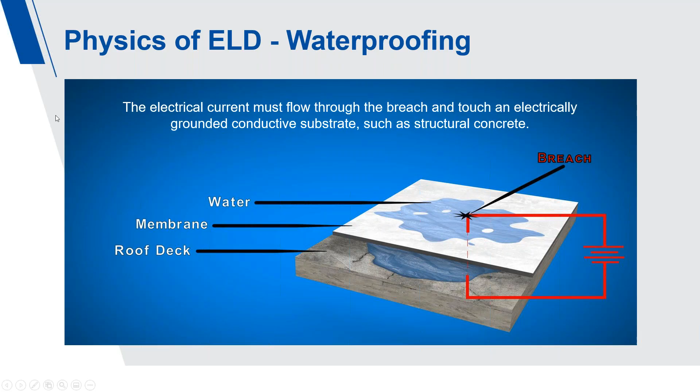Now, on a conventional roof, there's usually coverboard, insulation, and a vapor barrier below that membrane. None of those layers can carry an electrical charge, meaning ELD will not work. In new construction, if the membrane's already installed, these layers are blocking that electrical path to the concrete or metal deck. So in new construction of a conventional roof, there has to be an added conductive medium to make ELD possible.

That would be the TruGround Conductive Primer. That's what you're seeing here in this image - TruGround is added to the substrate directly under the membrane. In this case, it's coverboard, and that provides the required conductivity. So now ELD is possible, and these breaches can be found, repaired, and retested before the warranty begins or before the customer moves into that building. That is the physics of ELD on a new conventional roof.

These are the two ASTM standards for ELD. The first was published in 2014, the ASTM Standard Guide D7877. That lists the 4 different ELD methods: Detec scanning platform, Detec's vertical roller, low voltage vector mapping, and high voltage, also known as spark testing or holiday testing. That guideline, 7877, lists those 4 methods and describes the testing apparatus used, the testing procedure, and the limitations of that test.

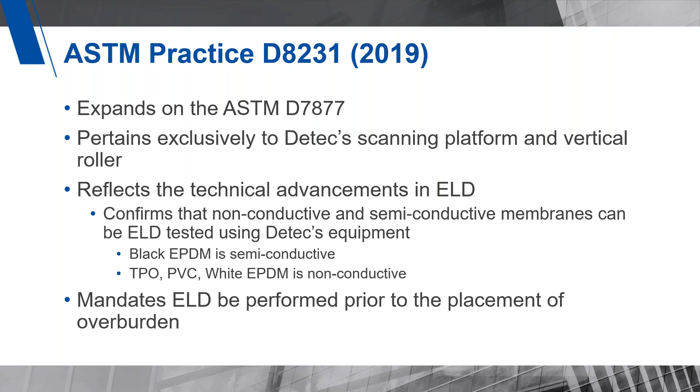The D8231 also mandates that ELD testing must be done prior to the placement of overburden. You can't test through overburden with reliable, repeatable results. I'll get to that here shortly.

So these are the 4 basic requirements for all 4 ELD methods. They all have to have a conductive substrate directly under the membrane. On the waterproofing side, that's usually concrete, and on the roofing side, it's got to be a conductive medium, such as TruGround conductive primer. They all have to have a ground connection to that substrate, something metallic or conductive that is connected to that substrate and penetrating the membrane. Usually that would be a metallic drain bowl, lightning rods, anchors, HVAC units, exposed rebar - anything you can connect your cable to that is metallic and touching that substrate.

They all have to have an exposed membrane, meaning it cannot be covered by overburden. There is no way to reliably get an electrical current through overburden with reliable, repeatable results. I will talk about that here shortly.

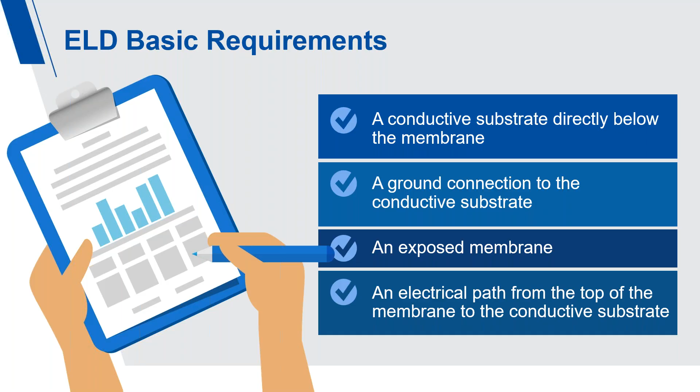They all have to have an electrical path from the surface of that membrane to the surface of the conductive substrate. Low voltage methods use water, and water is what carries the electrical current - wherever that current or wherever the water flows, the electricity flows. Then there's high voltage, which does not use water, and it's a direct vertical air gap, and you can actually see the spark travel through air. So this is high voltage, there's the spark.

High voltage was created for testing coatings on pipes, and then that technology was adapted for the roofing and waterproofing industry. It works on horizontals, verticals, transitions, but it does not work on semiconductive membranes such as black EPDM. The technician applies up to 40,000 volts to the surface of a completely dry membrane, and at the location of a breach, there'll be a spark, they can hear a pop, and the electronics will beep.

The limitations of this method are that it can only be done in dry conditions, so rarely is this ever seen here in the Pacific Northwest. It cannot be performed in inclement weather. There cannot be pooled water, frost, dew, or trapped water under a protection course - all of that can create a false positive. They'll spark into that moisture thinking it's a breach. So the membrane surface does have to be completely dry.

The technician has to adjust their voltage for the mil thickness that they're testing. In a fluid applied situation, if that thickness fluctuates and the voltage is set too high, it can actually burn through the membrane. And if the voltage is set too low, it won't even spark at all. So it's heavily reliant on that technician to have the proper sensitivity, the voltage set.

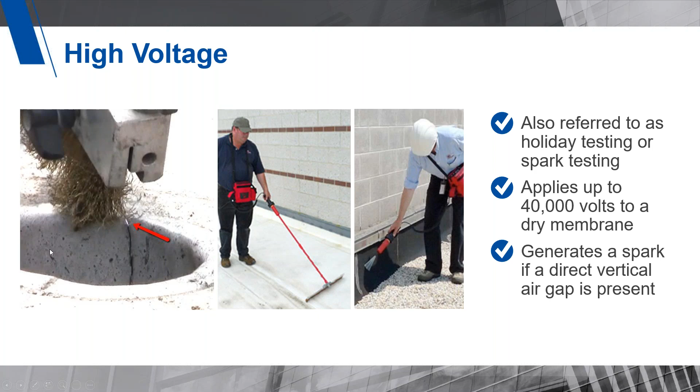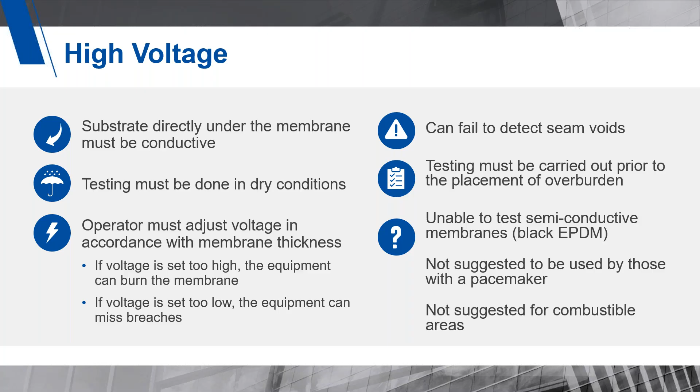High voltage does not work on semiconductive membranes such as black EPDM, and it is not suggested for those with a pacemaker or to be used in combustible areas.

The first low voltage method I'll tell you about is called vector mapping, sometimes called EFVM or vector testing. There's a lot of different terms used for it. This was also created in Europe in the 1970s, originally for testing pond liners that were filled with water, and then the technology was adapted for the roofing and waterproofing industry.

How this works: it works on horizontal surfaces that are non-conductive, so this does not work on black EPDM. The technician sets up a wire along the perimeter of a testing area - there it is in the background. All that wire does is isolate the area, usually up to 7,000 square feet or so. Then within that wire, they have to isolate every single grounded object, such as a drain, because those will be seen as a breach or a hole in that membrane.

Then the membrane has to be flooded with water. The perimeter wire is pulsed with up to 40 volts of electricity, and that electricity requires water to flow within that isolation area. So the larger the area that's isolated, the more water that's needed to carry that electrical current. If there's drains or the area is sloped or there's dry spots or gaps in that water coverage, all of that can result in a break in the electrical path, in that water path.

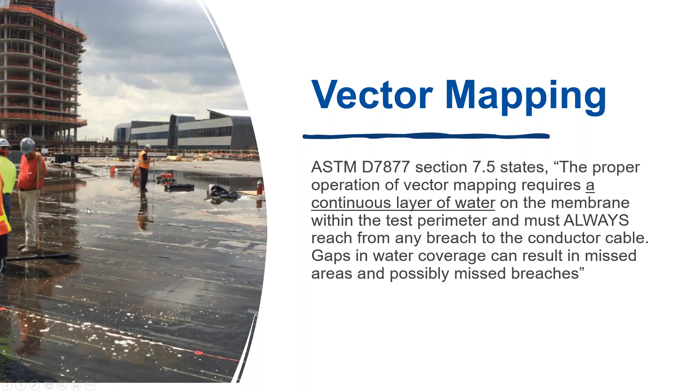That's why best practice with this method is to flood it with at least a quarter inch of water or more. Some testing agencies will use dish soap to help create that continuous film. Again, the larger the area that's isolated, the more water that's needed, and dish soap will help create that continuous film, but it's also an OSHA nightmare.

Now with vector mapping, they set up the wire along the perimeter, isolate the grounded objects, flood the membrane, and then use these probes, and the electronics point in the direction of a drop in voltage. What that means is the perimeter wire is pulsed with 40 volts, the surface of the membrane is 40 volts - that's where the water is - and then the location of a breach or the hole is 0 volts. That's building ground. So the electronics sees the sum of the entire area, pointing in the direction of everywhere where there's a drop in voltage.

So if there's a lot of breaches, that test can take forever. Basically they just hunt and peck and poke and prod, pointing in the direction of a drop in voltage. When they find a breach, it has to be isolated or repaired right then and there, otherwise the equipment will continue to sense it or point in that direction throughout that test. That can make testing very, very difficult if there's a lot of breaches.

Also, because it's pointing in that direction of a drop in voltage, you could have two breaches close in proximity, but it's pointing in that same direction. So multiple breaches in a specific area that it's pointing to might get missed.

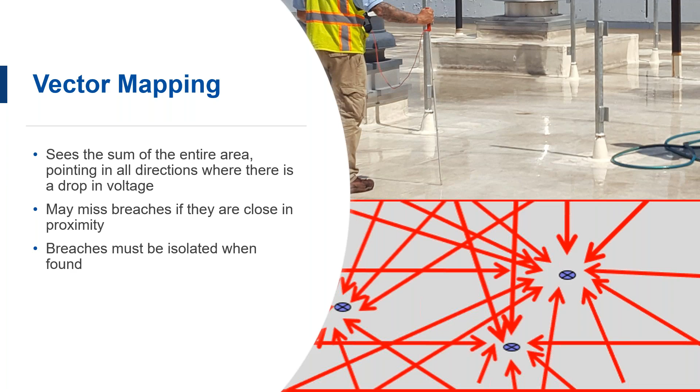Most companies that use vector mapping will never, ever use it on a vertical surface. It can be done, it's just not really feasible. The technician would have to set up a wire on a vertical wall, like a window frame or a picture frame. Usually one extra body will have to stand there spraying water.

The water has to hit that perimeter wire, which is charging the water with 40 volts, and the water needs to flow in a continuous path to that breach, through that breach, and to the conductive substrate below. So it can be done - it's just not really reliable. It's not feasible.

Most technicians or companies that use the vector mapping equipment will use high voltage or the vertical roller for a vertical surface.

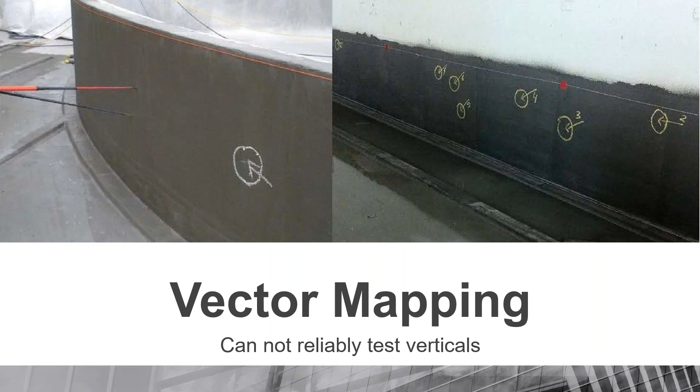Now, because this method has to isolate the area, usually that wire is 4 to 6 inches from the wall, meaning the transitions cannot be tested using this method. And because they have to isolate every grounded object, those cannot be tested around - and these are some of the most common areas where breaches actually are found in a membrane.

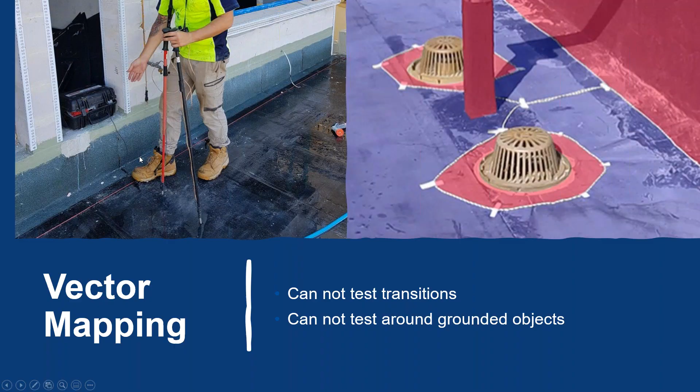You might hear that this method can work through overburden, and it can in very limited situations, such as gravel installed directly on the surface of a membrane, because the tips of these probes can physically contact that membrane. But it still requires that wire to be left in place below the gravel, and the membrane to be completely flooded. So within those limitations, it might be able to find something.

Now, if that membrane is covered by electrically insulating materials such as drain mat, root barrier, or insulation, none of those layers can carry an electrical charge. The only way they can is if they're saturated with water, which means the more insulating layers added above the membrane, the more water that's needed from the top down to complete that circuit.

So in an extensive overburden situation, here's the only way it would possibly even work: the substrate directly under the membrane would have to be concrete, the membrane would have to be non-conductive, and the wire would have to be left in place on the surface of the membrane.

Now keep in mind, that method probably did not test verticals, could not test transitions, and could not test around grounded objects. So there could be breaches present in the membrane that weren't even found in that initial test.

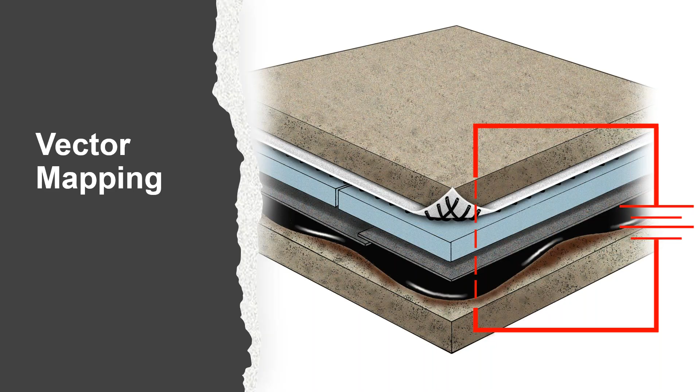Same thing for split slab. This topping slab is often electrically grounded, meaning the moment the probes hit this surface, it's grounded out. Even if it could test through this, it would need water from the surface of that overburden through all these layers, coming in contact with a flooded membrane, which will never ever happen. So again, valid ELD is only on that exposed membrane prior to the placement of overburden.

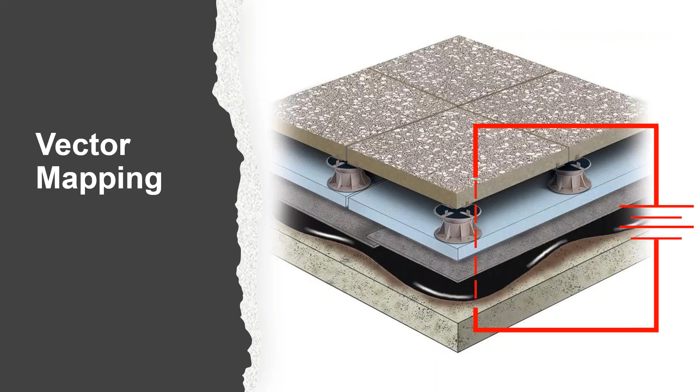I see it in specifications all the time, to leave a wire in place under pavers on pedestals. Low voltage ELD doesn't jump through air, it flows through water. So if these pavers on pedestals remain in place, it's got to be flooded from the top down, which I think we all know will most likely never, ever happen. So again, valid ELD is only on that exposed membrane prior to placement of overburden.

So with this method, these are the limitations. It's the only one with a lengthy setup process. It's the only one that has to isolate the testing area and isolate the grounded objects, and because of that, it cannot test transitions or around those grounded objects. It also requires a lot of water - the larger the area isolated, the more water needed. And if not enough water is used, and there's a gap in that water coverage, breaches will absolutely get missed.

Testing verticals is not feasible with this method. It can be done, it's just not easily done, and most vector mapping companies will never even make that claim. This also does not work on semiconductive membranes, such as black EPDM.

Now, in the early 2000s, two new additional ELD methods were created.

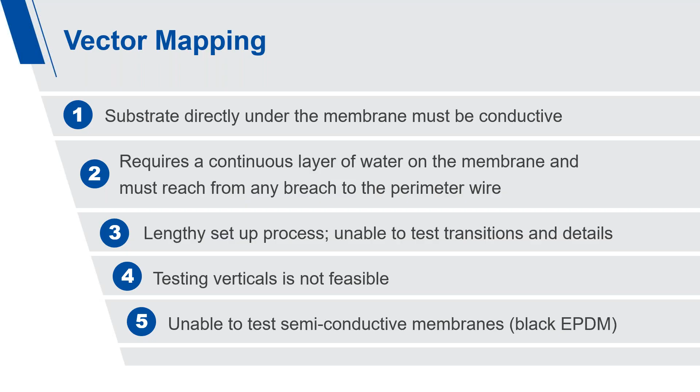Hey Sean, I just want to add one thing before you start into the Detec stuff. One of the things I get questions on a lot, anytime somebody emails me about electronic leak detection, is they seem to use it interchangeably with EFVM. I think you made it really clear, but I just want to highlight that fact - EFVM is a method of ELD testing.

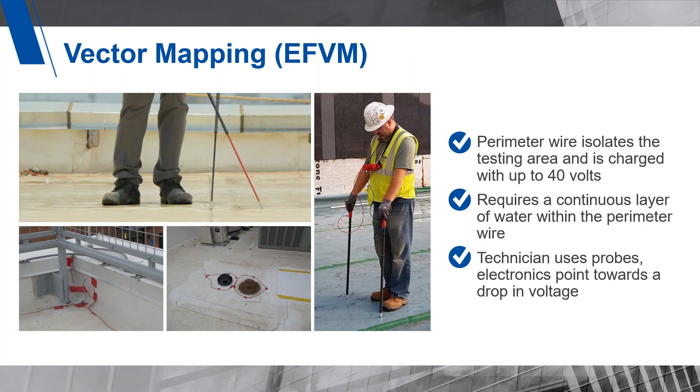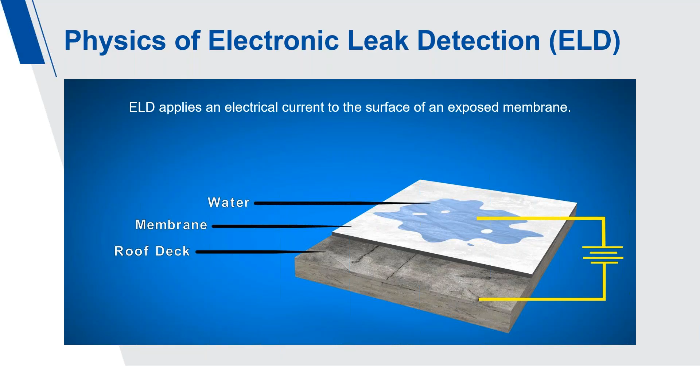So electric field vector mapping is what it's called. I would suggest to everyone on the call that if you're working with an architect or talking about a project, get in the habit of calling it electronic leak detection, not EFVM or vector mapping. That's all you're doing is limiting what system or testing system can be used. We want to get out of that habit of calling ELD EFVM. I just wanted to be clear about that, but back to you, Sean.

Absolutely correct. I can't tell you how many times people call and say we need a vector test, and I have to explain we don't do vector testing, we perform ELD. Same physics, different method. So the current term everybody needs to use is ELD. That's the term that encompasses all 4 methods from the 7877. If you call for EFVM, that's specific to one method and those limitations. If you call for ELD, that could mean any of these 4. So thank you, Chris, I appreciate you chiming in with that.

So the final methods I'll tell you about are called the low voltage scanning platform and the low voltage vertical roller, or the scanning unit. These units were specifically created to simplify ELD. It had been 30 years after vector mapping and high voltage had been created, the patents ran out, multiple companies started making the equipment, but the technology remained the same as it always had - same limitations, same procedure, very technical in use. So these methods were created to simplify ELD, make it more user-friendly, take out some of that guesswork, and be the best of both worlds.

These methods have the speed and ease of high voltage where they don't need to set up the wire, and they have the ability to test horizontals and verticals like high voltage. But it's got the reliability of low voltage because wherever the water can flow, the electrical current will flow. So these units took the best of high voltage and low voltage and made a new low voltage method that was more capable than what was previously around.

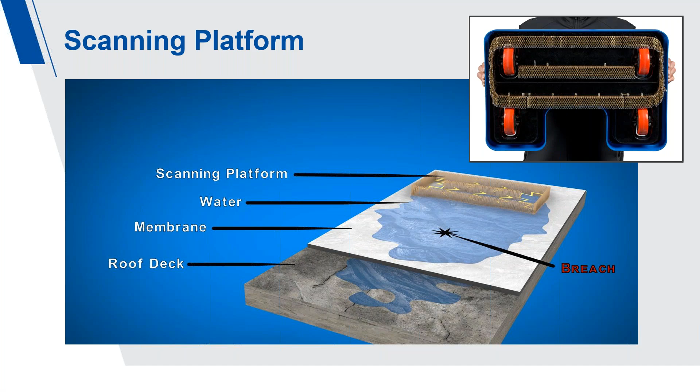There's also a built-in feature where the technician can place their hand on what's called a secondary sensor bolt. All that does is pass 9 volts through the human body, out their hand. The body is conductive, so the human body becomes an extension of this equipment. That's how testing is done around very difficult to reach areas or tight spaces, or around the flashings around a grounded object. That's also how we're able to test around drains. If you're looking at this image on the right, vector mapping would isolate that drain, and high voltage would spark as soon as there's a direct vertical air gap. This unit's human body can carry the electrical current so the fingers can test right up to around that grounded object.

The final method I'll tell you about is called the vertical roller. Same physics - the difference is this doesn't have that isolation area built into it. It's just like that center chain in the platform, which is the leak locating sensor, always searching for breaches. This works on horizontals, verticals, transitions, details, but it does not work on a conductive membrane like black EPDM. With that being said, we have invented the ability to test vertical conductive membranes, and that technology will be released next year. It'll basically be another attachment for this equipment that enables the ability to test those vertical conductive membranes.

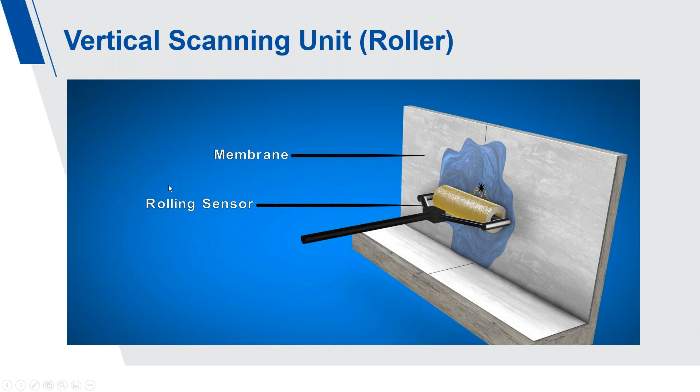These two units were specifically created for ELD compared to the others. They were created to make ELD more user-friendly, to take out some of the guesswork, to speed up the setup process for low voltage, and to create the ability to reliably test verticals. It was created to make ELD more capable with a low voltage method.

The limitations of the platform are that it only works on a horizontal surface, and that surface needs to be wet, not flooded, but wet. The physics of ELD needs a water path from the top down, and the roller has to be saturated with water. Wherever that roller goes, the electrical current will flow. And the roller cannot test semiconductive membranes such as black EPDM.

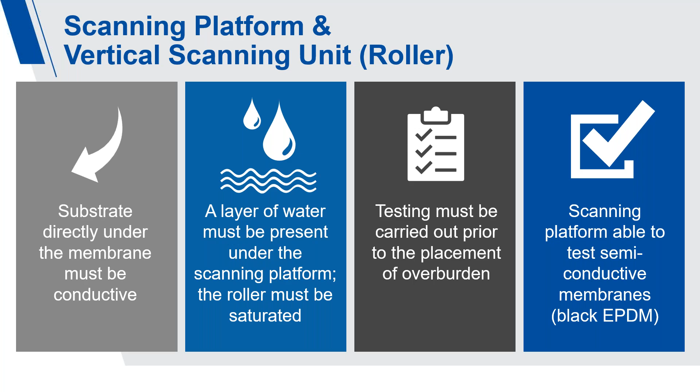Again, we have invented the ability. That unit is in the design and prototype phase right now, and will be released next year.

Here is a comparison of all 4 ELD methods. They can all test an inverted assembly, which is usually a membrane directly onto concrete. They can all test a new conventional roof with an added conductive medium, like our TruGround. Only high voltage works in dry conditions, and low voltage methods work in wet conditions.

They can all pinpoint a breach in a membrane. Vector mapping takes longer, but they can all find those voids. Now, when it comes to testing 100% of the area, vector mapping fails in that category because it cannot test transitions or around grounded objects.

It's also the slowest out of the 4 because it's the only one with a setup process. It has to isolate the testing area, isolate every grounded object, flood the membrane, and then the more breaches present, the longer that test takes.

Only high voltage and the roller can reliably test a vertical surface, and seam void detection is best for low voltage methods because, again, wherever the water can flow, the electrical current will flow. Currently, only the scanning platform can test both non-conductive and semiconductive membranes, including black EPDM, and a new vertical unit will be available next year.

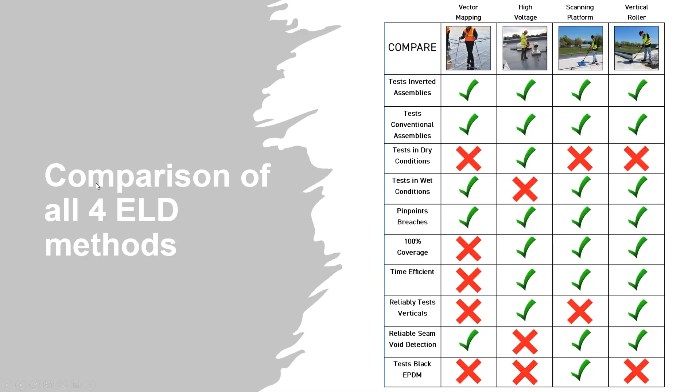Typically all 4 of those methods are used in new construction as a quality control test. They can also be used to locate an active leak — we call that forensic ELD. The physics are the same: concrete or metal deck, exposed membrane, electrical path from the top down, and water in that assembly is what's carrying the electrical current.

The farther that water has to travel, and the more electrically insulating layers it needs to flow through, the higher the likelihood that there's a break or a gap in that water coverage or that electrical path. So it might take a couple of forensic ELD tests to be able to find all the breaches.

We know water is coming into the building, but we don't know where it's coming from. We don't know if there are breaches in the membrane, and if there are, how many there are, and whether there's a water path from the breach through all these layers coming in contact with the concrete deck.

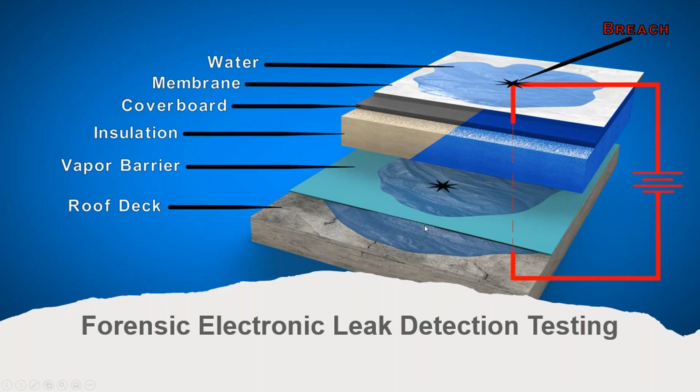With an active leak, the longer that leak has been present, the higher the likelihood that those breaches can be found. Forensic ELD is all dependent on water being trapped in a continuous path from the surface of the membrane to the surface of a concrete or metal deck. It doesn't have to be fluid or water — if those insulating materials are damp, that's enough to carry the electrical current. The farther that water has to travel, and the more dry insulating layers it needs to flow through, the harder it is to find those breaches in the membrane.

If it's mechanically fastened, those fasteners are often electrically grounded, but the test still requires water to make its way through the membrane and touch a fastener. If that doesn't occur, the water has to continue to saturate through and touch something else electrically grounded. If the deck is wood and there's nothing electrically grounded above it, the chances of finding a breach in that situation would be very, very slim.

Now back to new construction. All four methods require a conductive substrate directly under the membrane, and on the waterproofing side, that's usually structural concrete. It does need to be water cured or moisture cured.

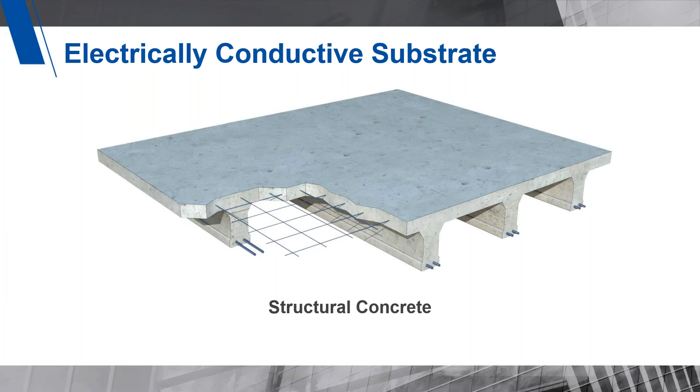We found that chemically cured concrete might not be sufficiently conductive enough. So we feel it's best that it should be water cured or moisture cured concrete.

If the substrate under the membrane is going to be cover board, insulation, wood, or lightweight insulating concrete, these four layers are electrically insulating, meaning they cannot carry an electrical charge. The only way they can is if they're saturated with water, which is the last thing you want in a brand new roof. So if a membrane is already installed on any of these four, ELD testing can be performed, but the likelihood of finding a breach would be very, very slim, especially if there's a vapor barrier.

Now, if the membrane has not been installed yet, then a conductive medium can be added in. A conductive medium is just a specially designed product that gets added into a roof assembly directly under the membrane, and that creates that required conductivity for ELD. And that's what our TruGround is. TruGround is just a water-based primer with carbon black. That's what makes it conductive.

It comes in a 5-gallon pail, and that pail will cover about 1,250 square feet. The contractor will mix each pail thoroughly and paint it onto the surface of that substrate. You can't measure it in a mil thickness. You're basically just making sure that the surface of that substrate is black and that you can't see the substrate through the primer. One pail will take about 1 man-hour to install, and it'll usually dry in about 30 minutes. Then they will put down their adhesives and primers and then the membrane.

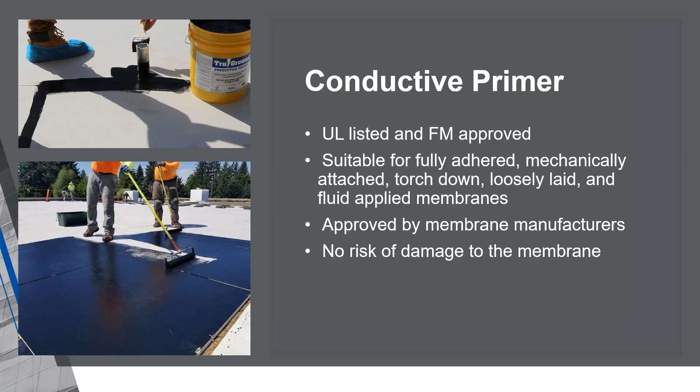And that's for fully adhered. You can torch directly to it, you can fasten through it. It has approvals with fluid applied coatings, as well as loosely laid assemblies with overburden, and it will never damage that membrane. The primer is available for purchase directly through Carlisle SynTec.

They are a stocking distributor. There is their product code. And if the TruGround is purchased directly through them, it will be included in a full system warranty as long as it's one of their approved FM assemblies. And to date, there are over 10,000 CCM assemblies in FM.

And Chris, would you like to tell them about those? Yeah, so I just, can you go back to the last slide? I just want to talk a little bit about that then too.

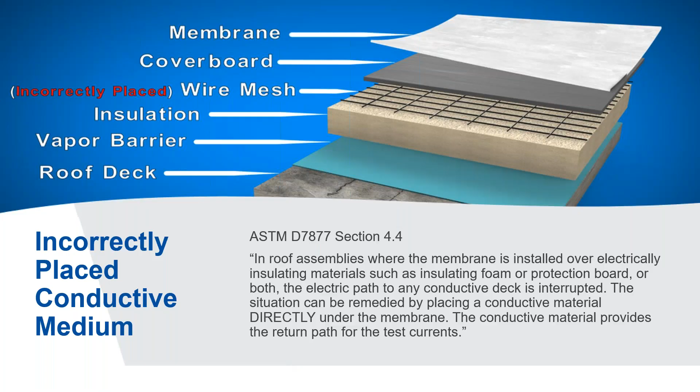So here's a quick summary. Today we talked about two different categories to ELD. There's the ELD testing of the membrane, and then there's what's called a conductive medium, which our product is called the TruGround. So often terms are mixed matched regarding ELD. Somebody will call it a leak detection system. Sometimes that term is talking about the testing, sometimes it's talking about a conductive medium, and sometimes other people are referring to a monitored system. So you want to keep the terms current and consistent. That is ELD testing of the membrane and a conductive medium, which enables that testing. Usually that's in conventional roofing, TPO, PVC, EPDM, and ModBit. So keep mind of those terms that you use.

There's 4 methods of ELD, low voltage and high voltage. They all have the same physics and same basic requirements, and that is conductive substrate, exposed membrane, electrical path from the top down. All 4 of those methods are primarily used in new construction, but they can be used to locate an active leak. We call that forensic ELD.

Valid ELD is only on an exposed membrane. You cannot reliably, repeatably, conclusively get an electrical current or a leak locating signal through any type of overburden, especially if there's drain mat, root barrier, and insulation. Don't fall for that lie.

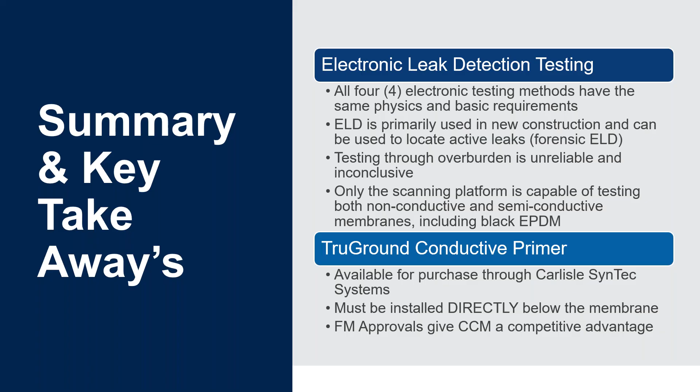And CCM does have over 10,000 FM assemblies with approvals, and they have a competitive advantage over all other membrane manufacturers.

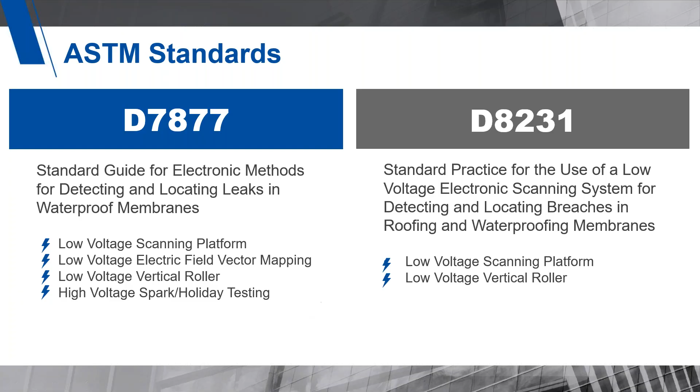Yeah Sean, that's a good point. Before I get to the next question, I want to mention that Carlisle, for a warranted system, if you want an FM approved assembly, we would want to use TruGround. That's what we're promoting. Now when it comes to the ELD testing itself, any of those four approved ASTM testing methods are approved by Carlisle. We have no say in how that membrane is actually tested. We prefer Detec's low voltage scanning platform, but that does not dictate any type of warranty. We have no say in that. So although you would buy the TruGround from Carlisle for the assembly, the testing is done by a third-party agency.

You can reach out to me if you have any questions, and I can put you in touch with Sean to figure out who the local testing agencies may be. In fact, last week we hosted a consultant training on the IntegriScan scanning equipment here in Carlisle, and we certified about 20 new testing agencies, so that's a plan for the future as well. We're going to continue to educate the consultant community to conduct this testing. Our SRWA program actually purchased the testing equipment from Detec, and we're now providing it through the SRWA loaner program. We're just trying to help push this industry forward because we really believe in it. That was a good question.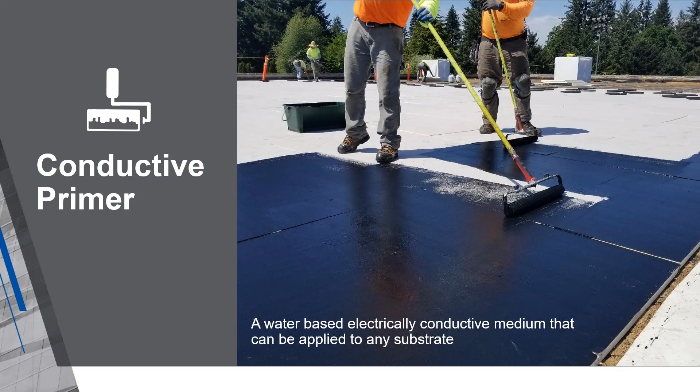So the next question: will the primer work applied to polyiso, or do you need a cover board? We addressed that, right? It'll work on pretty much any substrate that you want to put it on. It'll work on wood, paper face polyiso, coated glass. It'll work on DensDeck and SecureRock. So yes, whatever substrate directly under the membrane is going to be non-conductive, that's where it would go.

The next question is, this is a good question too: can the conductive primer be spray applied in lieu of roller applied? Absolutely. Most companies that have applied the TruGround prefer the roller application method. There have been a couple of contractors that have spray applied it. I believe you would use just a hydraulic sprayer, and you're going to have to take out the filter so it doesn't get clogged with the carbon black. But that's as far as I know regarding application using a spray method. Yes, it can be done.

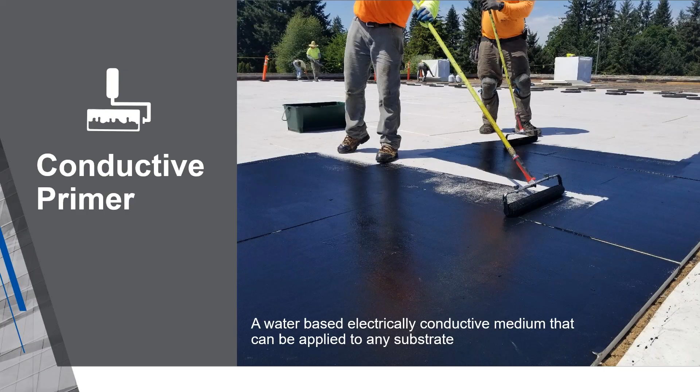The next question is, are mechanically fastened roofing systems possible through our warranty if you use TruGround? That's more for me, Sean. What I would say is yes, they are. The reason why we tested the adhered systems is because we wanted to see if there was any interaction between the adhesion of that roofing membrane through the TruGround. But if you were mechanically fastening the roofing system, we would have no problem with that. It's not going to cause any type of detrimental effect.

Now I think there's another question about a Rhino bond system, maybe there's not, I thought I saw that come through. That might have been from the earlier presentation. So, will it work with Rhino bond is a question. I believe the answer would be yes, it would. However, you want to apply the TruGround before you put your Rhino bond plates down. I don't think you'd want to paint over that. But Sean, do you have experience with that? Well, I know that there is an approval with the Rhino OMG Rhino bond.

Preferably, I think it would go on either before or after the plates. If the plates are metallic and they're touching the primer, then they're grounded as well, so either way works. But the Rhino bond works through special plates that have an adhesive built in that's activated through heat, and I'm worried about interaction. So I'd say you would want to apply the TruGround prior to using your Rhino bond plates, just to ensure that it's going to work. We may test that here in the future, just to see if there's any interaction. But as long as it's down before the plate is installed, you won't have any issue.

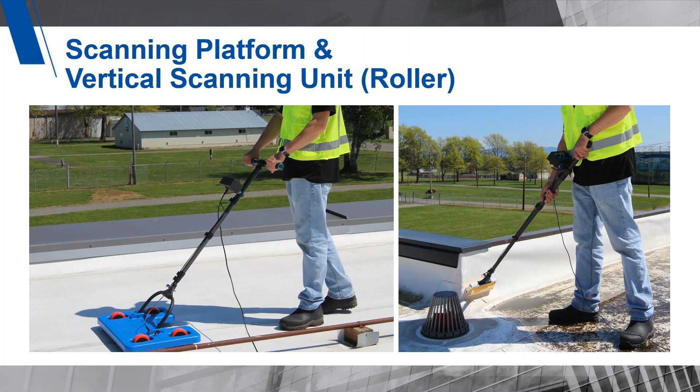Can you explain how ELD works with a mechanically fastened system? Wouldn't the screws cause a constant ground from the membrane to the substrate?

Good question. The physics of ELD is the equipment will only alarm if there is a void in the surface of the membrane that allows that path to travel to the fastener. So in low voltage at least, in a mechanically fastened situation, the water would have to saturate through the breach and touch that fastener, which cannot be confirmed.

So let's say you test the area and no breaches are found. It doesn't mean there's no breaches present. It could mean the water has not saturated through to a fastener, so that's an invalid ELD test. It would still need a conductive medium in that situation.

I have heard that sometimes high voltage can spark at the location of metallic plates or fasteners under the membrane, but that doesn't indicate it's a breach. It's just sparking through that thin membrane.

Yeah, I agree there, Sean. I think maybe more of the question is just, do the fasteners affect the testing? And no, because that's what you're looking for — you're looking for that grounded connection. Right, and that's how it works.

ELD is focused on the surface of the membrane, not what's below it. The equipment will only alarm if there's that path from the top down, so no false positives. All right, I did get another one that came in here, Sean.

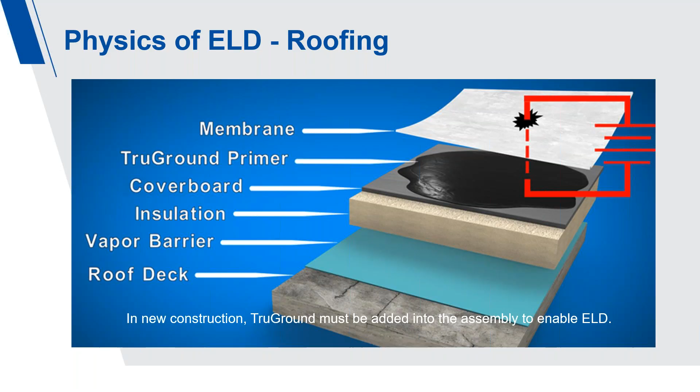I think I can take this one. It says, can the TruGround be factory applied to the cover board instead of field applied, and then connect the sheets together in the field? Yes, that absolutely can be done.

I know Sean has mentioned contractors who, let's say if it's a day that might be rainy, will have their guys apply it in the factory, and then when they get to the roof they can just lay those boards out. If the question is whether there's a plan to develop a board with TruGround already on, I would say stay tuned — maybe, I don't know. That's how I'd put it. All right, we got another one too, Sean.

So with green roofs, what if the vegetation is installed in planters directly over the membrane, or if there is no insulation installed over the membrane?

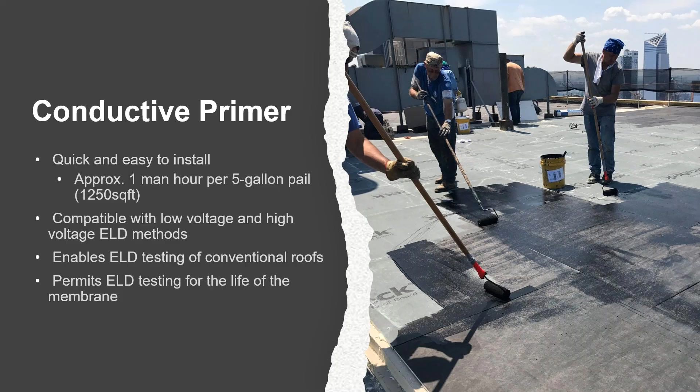Again, same physics. So let's say vegetation is installed directly on the surface of the membrane, with no drain mat, root barrier, or insulation in between those layers. Then the tips of the probes can contact that physical membrane.

But again, that wire would have to be left in place after the initial test, and that overburden has to be saturated with water. So within those limitations, it might work. But if there are insulating layers between the surface of the overburden and the membrane, that's where the break in your circuit will happen, and the leak locating path is disrupted.

Okay, good. And then we got another one: can TruGround primer be applied to ISO boards, or does it require a cover board?

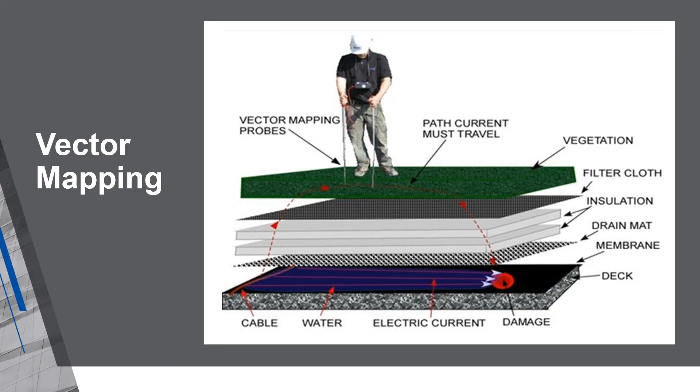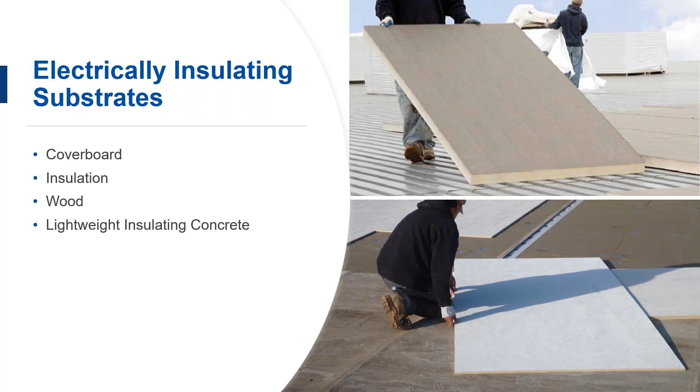We've addressed this earlier, I think, but it can be applied to the insulation as long as — we've approved it with all of the standard insulation, so InsulBase, Secure Shield products, whether it be Secure Shield HD, Secure Shield HD Plus, or regular Secure Shield, as well as DensDeck Prime and SecureRock. So yeah, it can be insulation or a cover board.

However, if it needs to be FM approved, only some of those are approved with FM for reasons I explained earlier. And it's got to go directly below the membrane, whatever that substrate is — exactly, true, whether it's cover board or insulation.

Now, let's say for some reason it's not allowed on the cover board and it has to go on the surface of the insulation below that. That can happen, but again, that test now does not comply with the ASTM standards. It would not be our preference to place the TruGround in that assembly that far below the membrane. So in that case, it could be used, but the results of the test would be considered invalid.